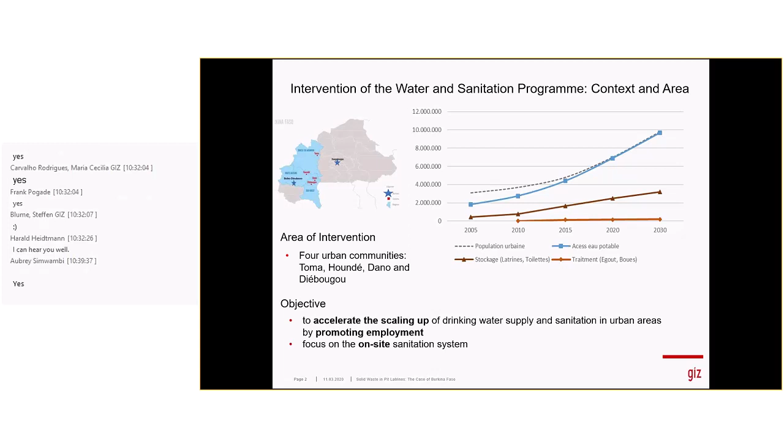And this is the reason for the project objective, which is to accelerate the scaling up of drinking water supply and sanitation in urban areas by promoting employment. We are focused on on-site sanitation because a sewage system is too expensive for our country. We are working in 4 small and middle towns, which are Diebougou, Houndé, Toma, and Dano.

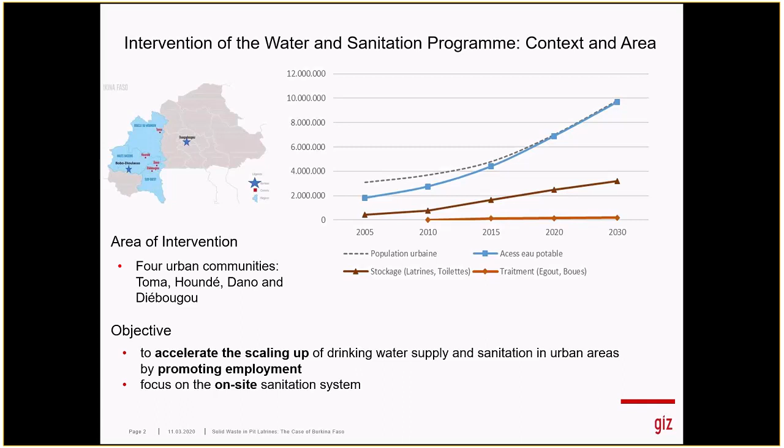In slide 3, we have made a national diagnosis of the fecal sludge management in our 4 towns. Here are some of the results about the solid waste part in pit latrines. We have got 32% of people who agree that they throw solid waste in the pit latrine. When people are asked why they put solid waste in the pit latrine, they say that it's fear of injuries, bottles, and other sharp objects, lack of solid waste management structure, and convenience of the pit latrine.

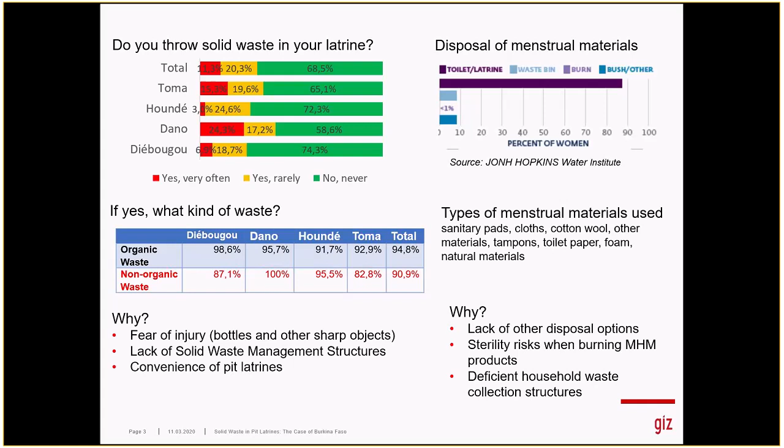When we do a typology of non-organic waste, we have broken bottles, drugs, stabbing weapons, syringes, and other non-organic waste. We also have risks for pit emptiers: waste clogs the compressor of the truck or pipes, and there are injuries for manual emptying. What are the implications for us? It's difficult in processing and recovery.

We have a need for systematic separation of hygienized sludge, and also high cost and impossibility for us to do the test on post-treatment hygienized fecal sludge. Another problem is accumulation of fecal sludge in drying beds, because in Burkina Faso we have drying beds, not constructed wetlands like in other countries. We also have difficulties in fecal sludge recovery in our country.

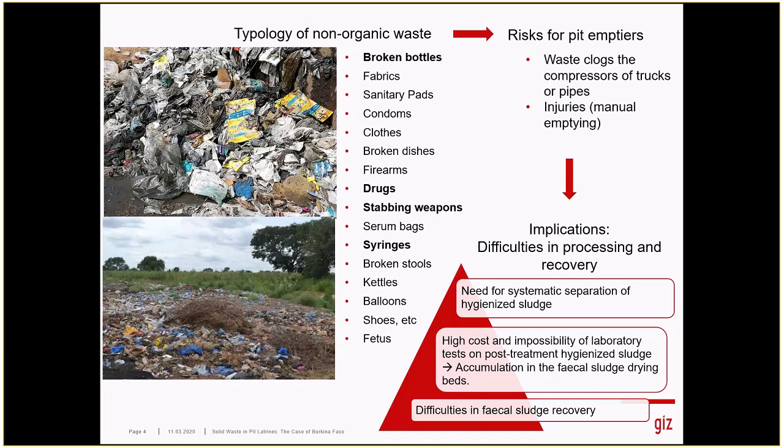And finally, we ask a question for all the participants. Is it possible to stop the promotion of dry pit latrines in our country? Is it the solution, the end solution? That is our question.

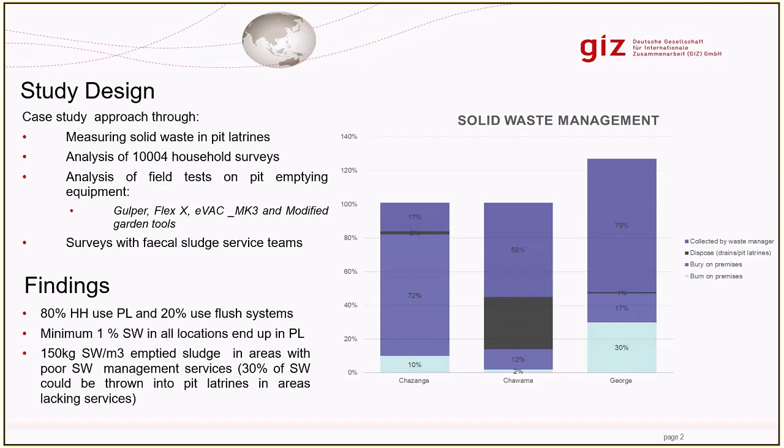Next slide, please. Alice? Yes, I have the next slide here. Can you see? May I have the next slide? Yes, the first one - you have it? Yes, it's coming up, it's quite slow. Maybe it's my internet. Oh, maybe it's mine. Now let me continue speaking. Okay, in case the slide is lagging, I'll continue speaking.

To understand the effects on pit emptying services, from pit emptying to treatment and disposal, we found that solid waste increases the pit emptying time more than twice.

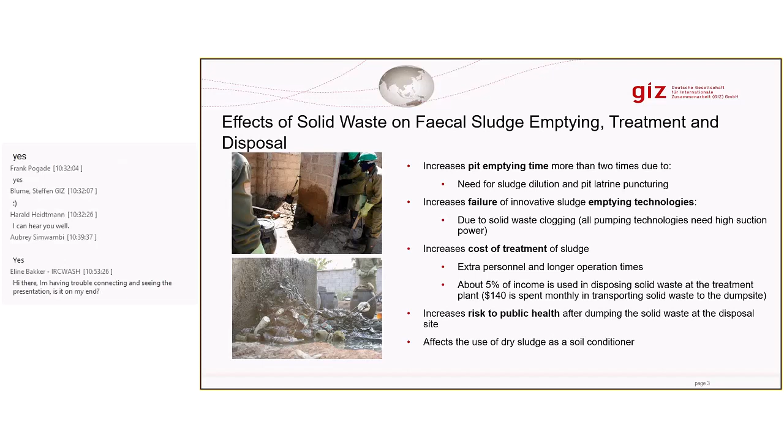This is because first, the pit emptiers need fresh water to dilute the sludge in the pit so they can easily scoop it out. They also need to puncture the side of the pit latrine, as you can see in the top left picture, start emptying, and when finished, they need to mend the hole and also disinfect the soil around where they were emptying.

The next point was that solid waste increases failure of innovative technologies. This is because the solid waste tends to clog the pathways for the sludge. This combines with the first point - for the innovative technologies to work effectively or efficiently, they also needed to dilute the sludge, and the machine needed to have high suction power.

This brought up lots of challenges, because for it to have high suction power, it needed high amounts of energy, and this caused challenges in some electrical equipment. Some of them even failed maybe twice or thrice in the field.

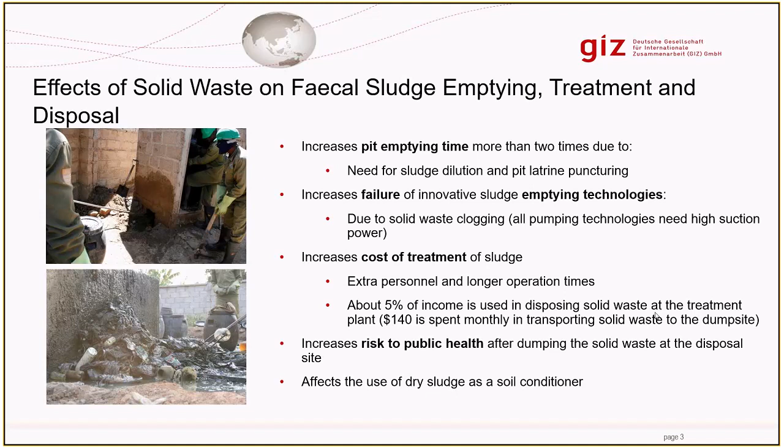Next. Then we drew some lessons from what we found from the households and also from the pit latrines.

Solid waste is disposed into pits mostly by households lacking solid waste management options. High amounts of waste are prevalent in pit latrines compared to flush systems, because pit latrines have a huge hole for the interface, so whatever solid the household wants to throw into the pit can go in. But flush systems can only take things which can be easily flushed by a 9-liter system.

With most households, menstrual health and hygiene products are the prevalent solid waste found in pit latrines. Even households with proper solid waste management services still find menstrual health and hygiene products ending up in the pit latrines or other containment or storage facilities.

Then when it comes to the treatment plant, there's a high need for operations and maintenance, not only for the treatment plant but also for on-site sanitation facilities. This is because when solid waste is thrown into these facilities, the filling up rate is quite high.

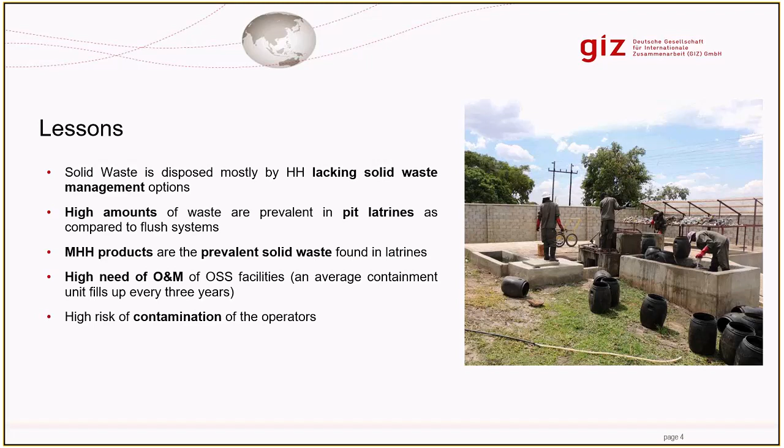Then we came up with recommendations. Next slide, please. We came up with recommendations because in areas where solid waste is not managed, it's often due to lack of understanding of the laws.

So the first recommendation is that countries need laws and standards for sanitation systems, and these laws and standards must be adequately enforced. You might find the laws are there, but people are not aware of them and don't know the implications of going against the law. So it's very important that the law be adequately enforced.

Then community awareness on solid waste management must be enhanced, but it should not just be a standalone effort. It should move parallel with waste collection, because when you give people options for solid waste management, they are going to follow the message. But if you just give them the message without giving them the service, the practice is going to continue.

Then solid waste management must be planned in all future fecal sludge management projects. Solid waste management services must be handled hand in hand with fecal sludge emptying services.

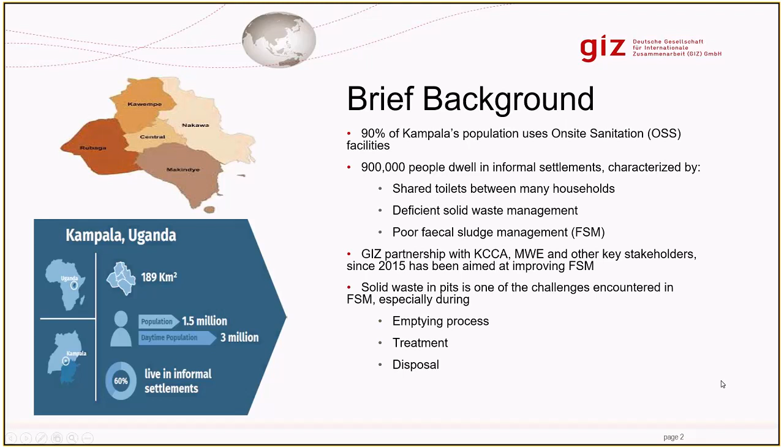And also, as the rest have mentioned, it's a challenge when it comes to disposal, because nobody really wants this solid waste that has been contaminated with fecal sludge. It's also not clear where to dump this kind of waste, because at that point it becomes infectious and hazardous. Next slide, please.

So the question is, why is it that we have this solid waste in the toilets, in the pit latrines? For the case of Kampala, as everyone has also said, it's really because of the solid waste management practices that we have in Kampala.

The collection of solid waste is subcontracted to a private company by the local authority, and being a private company, they charge a fee to collect the solid waste. When it comes to informal settlements, this fee is sometimes considered a bit higher or unaffordable for the dwellers. Also, because it's an informal settlement, accessibility to the last house is a challenge because of the size of the trucks, and some areas are not accessible.

So the people who dwell in those far-to-reach areas end up looking for alternative solutions in how to manage their waste, usually dumping it in trenches or open burning, and of course the pit latrines are a good option for them.

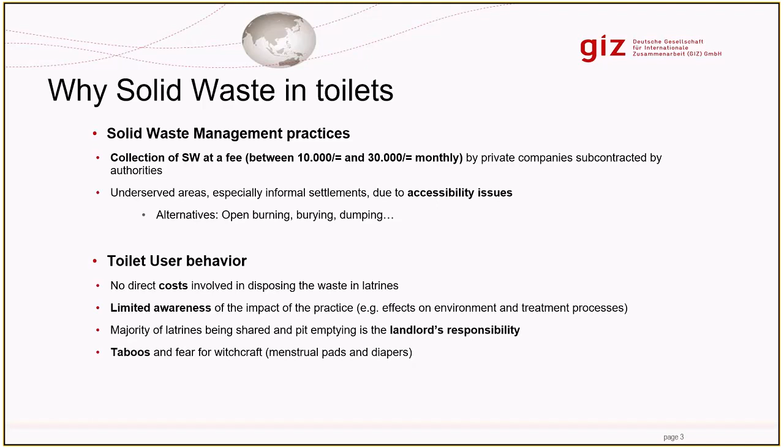And as Somé had mentioned earlier, some of the solid waste in the pits are menstrual pads and diapers. For the case of Uganda, there are some taboos and cultural beliefs around someone else looking at your blood or your child's poo. So to avoid that or to feel safe, people prefer to dump the pads and diapers in a pit latrine where nobody will see it. Next slide, please.

So the question is, what are the implications of these actions? Solid waste in pits, as we all know here, shortens the lifespan of the latrine. It also makes emptying difficult, as has been mentioned multiple times here. When you interact with the emptiers or the private operators, they tell you that when they go to a pit that has solid waste, they take much time emptying that pit, and they are also exposed because they have to separate the solids directly, and this is also a risk to their health.

It also increases the emptying costs, in the sense that for Kampala, sometimes the private operators end up charging an extra fee for this solid waste to take it away. And also, we have a new ordinance that has been developed, a specific ordinance targeting fecal sludge management. In that ordinance, we captured the aspect of trying to control the solid waste entering pits by increasing the cost that one has to pay for the solid waste.

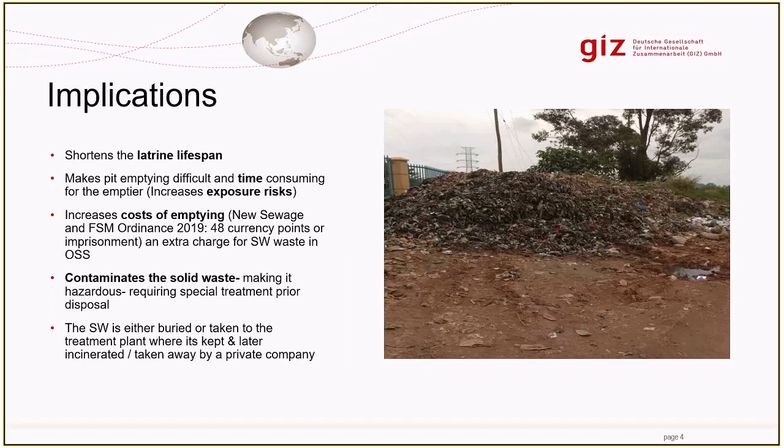Solid waste here, for the case of Uganda, we either bury it at the moment or it's taken to the treatment plant. And as I mentioned earlier, the treatment plant also has the challenge of how to deal with this waste. Usually they try to incinerate it. However, this also brought in issues around air quality, so it was a challenge in that area. So those are some of the implications of solid waste in pit latrines. Next slide, please.

So what have we done, or what could be done in this regard? The consensus here in Kampala is to find ways of minimizing the amount of solid waste that enters the pit latrine. As I mentioned, one intervention is the ordinance, with stringent measures if they find that you have solid waste in a pit. Also, a sanitation improvement and financing strategy is currently being developed, and it captures solid waste in pits, because Kampala is saying that they do not want any more solids in pits.

So in this strategy, they come up with clear ways on how this issue can be tackled. One is minimizing the amount of solid waste entering pit latrines, both at household level and at institutional level. Key interventions are, first of all, strengthening and improving solid waste management at community level, and also conducting behavior change campaigns. I gave an example here of one campaign that has been successful in Kampala. It's called the Weyonje campaign.

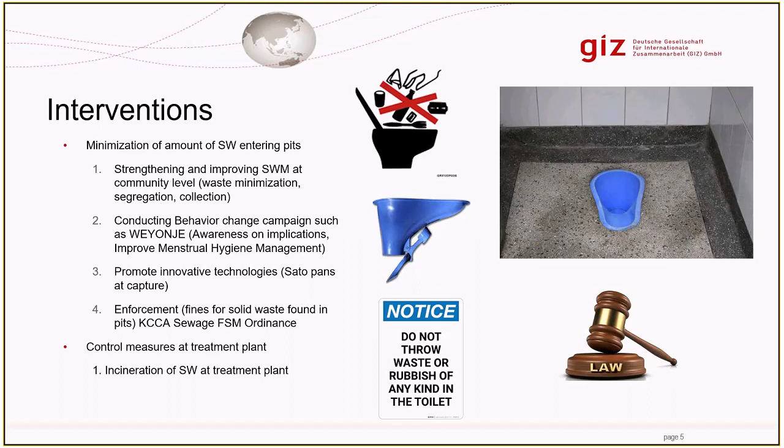And everyone else, thank you also for highlighting the similarities. I think we have seen that in terms of challenges and implications, the issue is quite similar in all three countries, whereas each country, as the presenter said, came up with their own local and sometimes quite innovative solutions. So that was great. Thank you for this exchange.

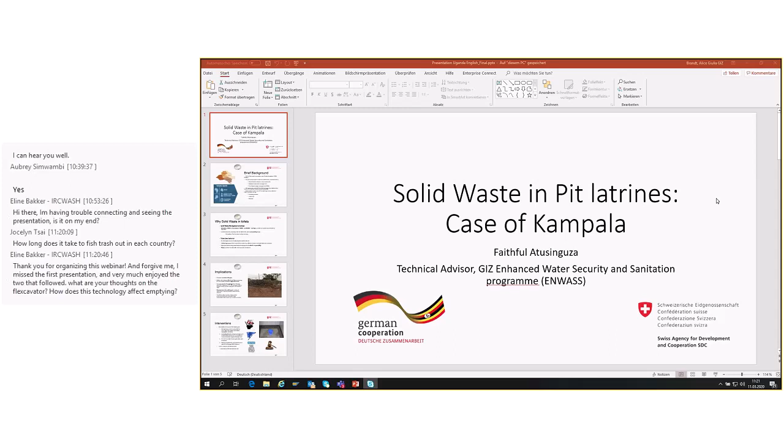Yes, so it depends on what trash is in the pit latrine. Mostly our pit emptying teams are giving the services in clusters. That is like 12 barrels, 24 barrels, and 32 barrels. So we do not fish out the trash separately. We remove the sludge together with the solid waste at one go.

So you find that for a 12-barrel pit, they might take maybe about an hour to remove the sludge and the solid waste. Then they are going to separate the solid waste at the treatment plant. Okay, thank you. Faithful, would you like to react to this as well? Do you have a comparison in terms of how long it takes in Uganda?

So in Uganda, we have two kinds of emptying technologies. We have the gulper, and this gulper will literally take up everything from the pit, even the solids. So it may not have a big challenge at the point of emptying the toilet. However, when they get to a treatment plant, as Aubrey said, this fecal sludge has to be separated from the solid waste that has been taken.

But when it comes to the vacuum trucks, this is where they have a big challenge, because they can only take the fecal sludge, they can't take in the solid waste, and it usually takes them a long time. If they come to a site with a lot of solid waste, it takes them close to 2 hours to complete what they would have done in like 45 minutes.